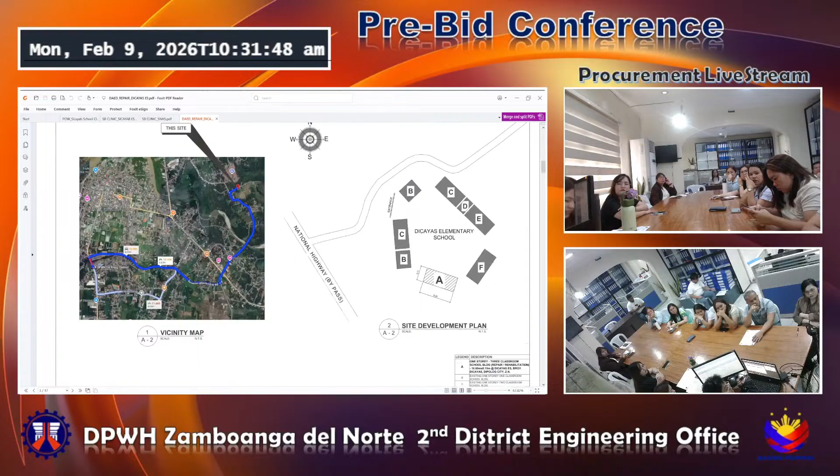The plan done includes installation and replacement of floor and wall tiles in toilets, installation and replacement of water closet and lavatory, installation and replacement of doors and windows with window grills, installation and replacement of pre-painted roofing sheet with complete accessories, installation of reflective insulation, ceiling and ceiling frame, ceiling vents, fascia board and fascia board frame, fabrication and installation of new roofing, CHB wall at parapet along end walls, and repainting of exterior and interior walls.

Also included is replacement of chalkboards, installation of wires and wiring devices with complete accessories, replacement of lighting fixtures and convenience outlets, installation and replacement of sewage lines and fixtures for each classroom, installation and replacement of water lines for each classroom, construction of septic tank, and installation of downspouts and roof gutters.

For the next project, we have 25JC0125, repair and rehabilitation of 4 classrooms at Marupay Elementary School, Barangay Marupay, Jose Dalman, Zamboanga del Norte. This covers repair of a 1-story 2 classrooms building, 7.9 by 16 meters plus 2 meters corridor, for building 1.

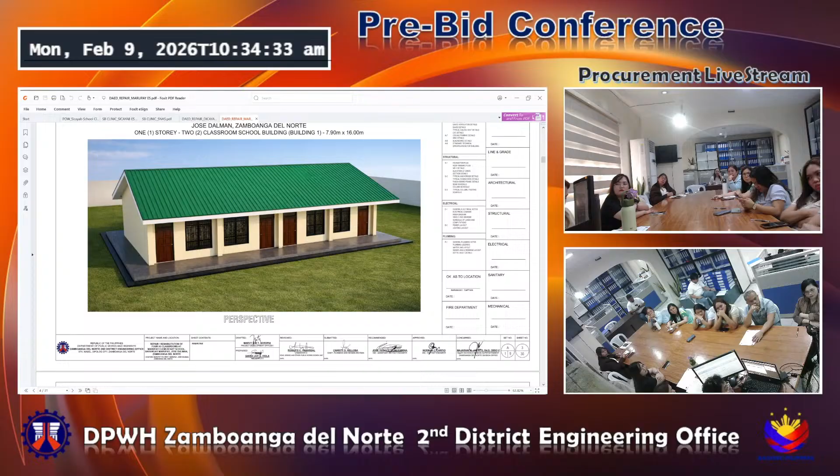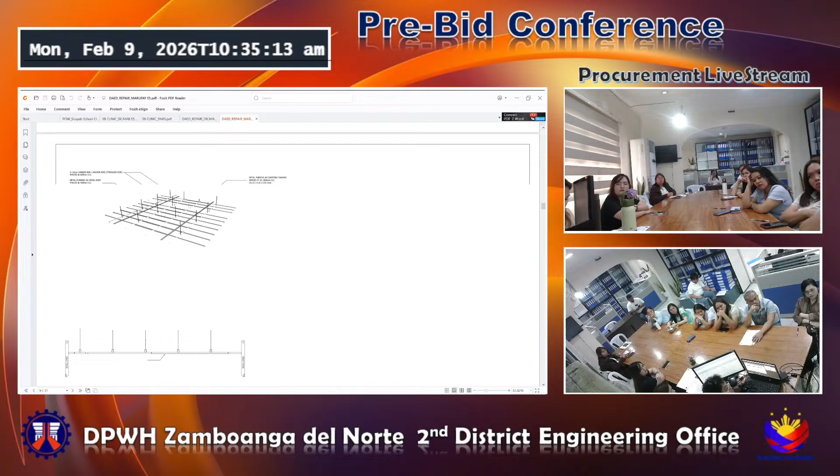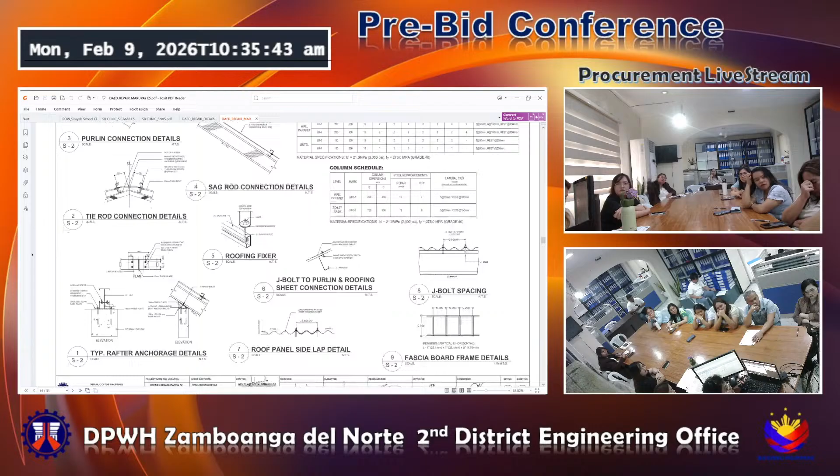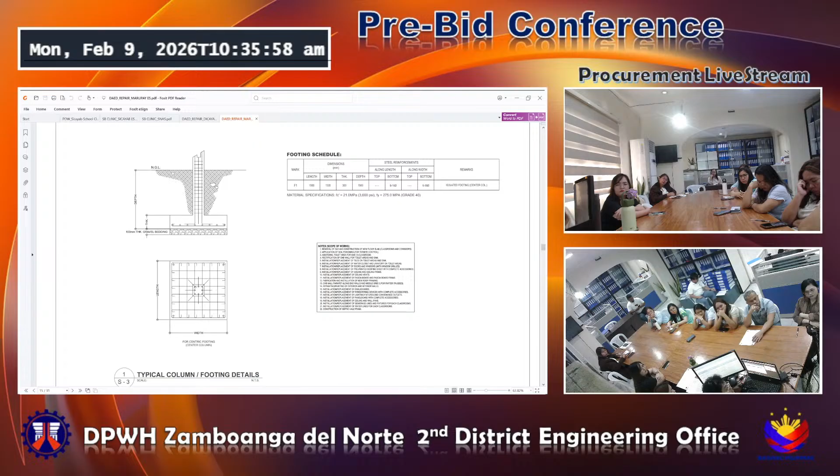In building 1, CHB wall parapet along end walls for buildings 3 and 4, repainting of exterior and interior walls, replacement of chalkboards, installation of wires and wiring devices with complete accessories, installation of lighting fixtures and convenience outlets, installation and replacement of panel board with complete accessories, installation of ceiling and wall fans, installation of sewage lines and fixtures for each classroom, installation of water line for each classroom, and construction of septic tank for this project.

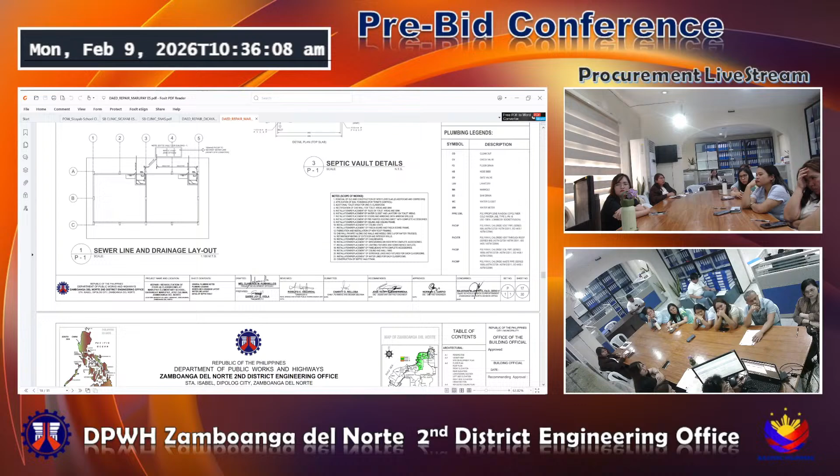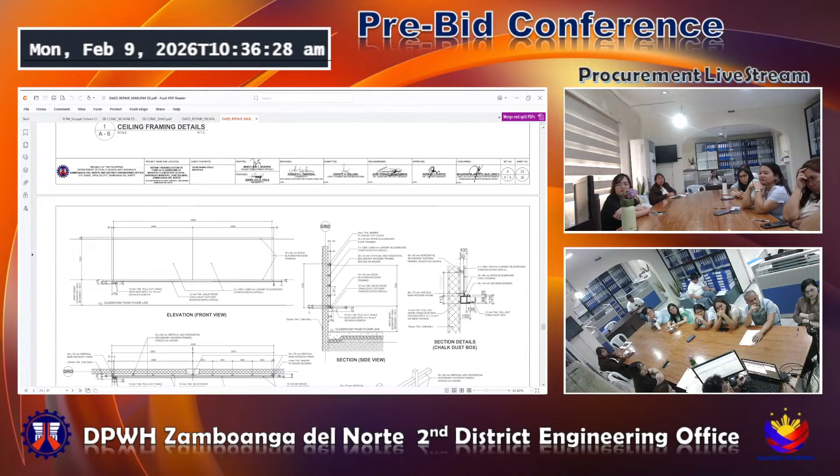Please note that the prices of these materials were based on CMPD 2025 second quarter and CMPD special issuance. It is also incorporated with hauling, and the equipment rental rates are based on ACEL Guidebook 27th edition, and labor rates based on June 2025 rates in DPWH Region 9, Zamboanga Peninsula. The 12% VAT has already been applied for these projects. That's all for the plans, program, and scope of work for this project.